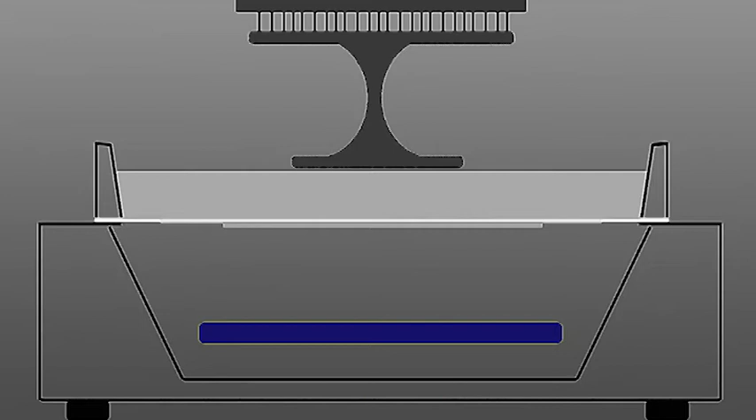What we've got here is the build plate at the top, and we're going to build the table downwards. So we've got the first raft being developed. As we come down, here are the supports, and then after the supports, we start to produce the tabletop. But imagine now that that's coming down into the vat, through the resin, onto the FEP. It's then exposed, and as you pull it off, that very thin surface at the end of those supports is going to be distorted. And so we're going to get some bending on that.

So what we have to do then is not build it level to the build plate. What we should do is build it at an angle. So just taking some of these things off, let's remove all that support. We've now got our table hovering above the build plate. I've turned it over because it makes more sense to do it this way.

And what I'm going to do first of all is go into the controls, and over here I've got some adjustment controls that'll move it horizontally and vertically. This one allows us to spin it. This control here allows you to alter the scale, and this one produces a mirror image.

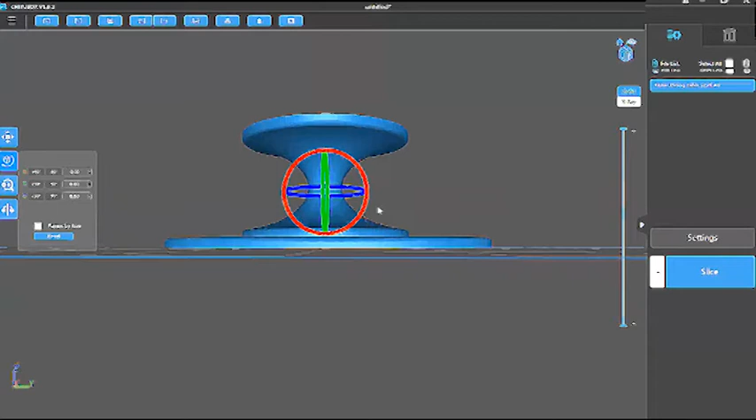So the one we're after is this, and as you can see, as soon as we come up with that screw, we can now tilt this by getting hold of the red circle there. I can tilt that at about 30 degrees. I'll also tilt it forward to back by another 30 degrees or so.

Now, if you look at the actual area we've got, just pull down here through the slicing thing, you can see that the only part of it that's being exposed is a very small area. And compared with the build plate, the raft that we've produced already, then that's quite small. That isn't going to get distorted. And you can build up all the way through. And again, at each stage, each layer is going to be very thin and a very small area compared with the raft. Okay then, so that's how we're going to go with that.

Let's now start putting supports on. Reduce it in size a bit, see what we're doing. Now there's several ways of doing this. First of all, the Z height. This is the height that the item is actually above the build plate. So we could bring it right down or take it right up just by clicking on the arrows. It needs about 5 millimeters to get sufficient distance between the raft and the item that you're printing. Otherwise you get all sorts of distortions creeping in.

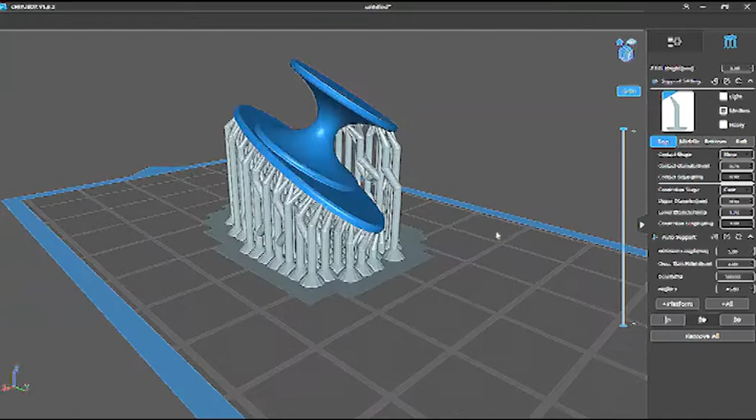We've got it set to medium supports, and on this, it's Chitubox software, I tend to use it. Medium seems to be a pretty good standard for what I'm doing. And just by going down here onto platform, click on there, and you'll get an awful lot of supports generated. Probably more than you need, to be honest. But that's one way of doing it. You could simply slice it, export it, and print it off, and it would look all right. You've just got an awful lot of supports, some unnecessary ones.

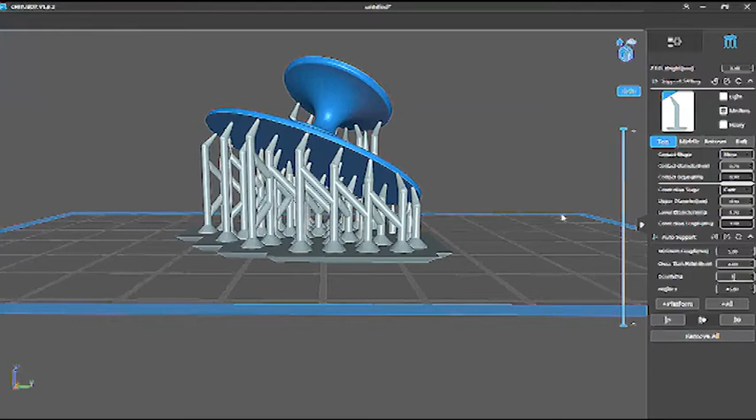We can look more scientifically at that by removing all of them and going down here to the auto support facility. Minimum support length 5 millimeters. It's fair enough because we've got the height at 5.5. The next significant figure is the density. If I reduce that from 100% to 1% and then produce a platform, you'll see we still get quite a few supports in there, but nothing like as many. If we don't do any of that at all, so we remove all those, you can actually put your own in. So these here allow you to add a support, remove a support, or edit a support.

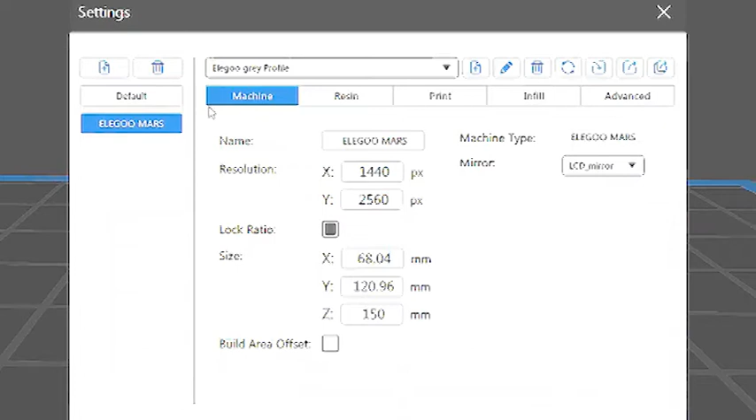Before we slice it, consider the settings for the print. Now my printer is an Elegoo Mars. That's the machine specification. No need to change any of that. The resin spec is normal resin type, resin grey. It's about £35 a litre. The reason you need that is it'll work out how much the print's costing you.

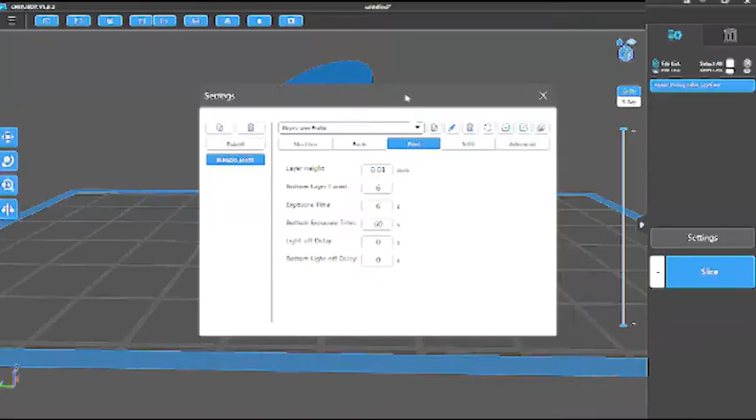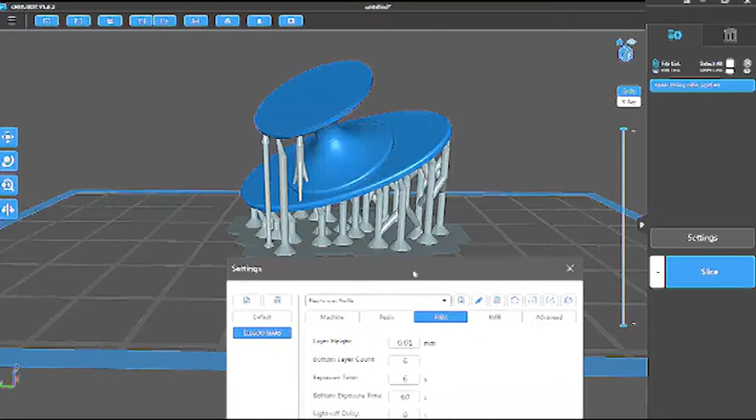And then the print, I'm going to print this at 0.01 of a millimetre. That's 10 microns thick. Bottom layer count, 6 layers. That bottom layer really needs to be well etched into the plate. You don't want that shifting. So you have a number of layers there, probably 6, and the exposure time is quite long. I usually use about a minute, 60 seconds. Again, it depends on how much weight that has to bear. But that's about right, I think. And the normal exposure time for all the other layers, instead of the base, is 6 seconds. It doesn't need to be that long because we're only doing 10 microns thickness.

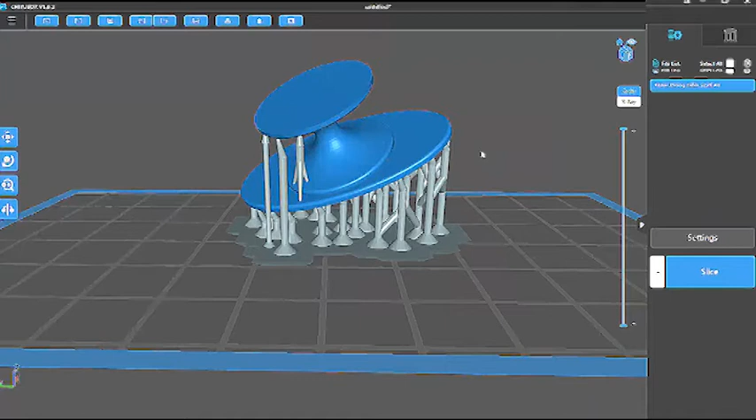If we were doing 100 microns, yes, you'd need to increase the exposure time to make sure that all the resin in that gap is exposed. So having done the settings, and before we slice it, let's just think what we've got here. That section in the center is solid resin at the moment. Now, it's going to cost a bit. You don't want to waste resin by printing on that.

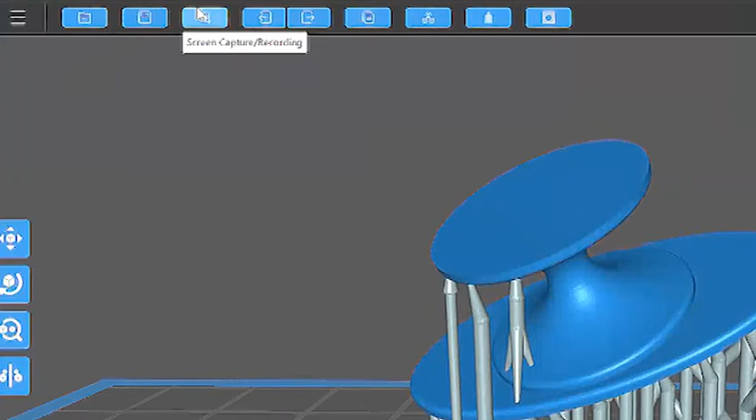So what you could do is hollow it. And up here, we've got open file, save file, screen capture recording, forget that, undo, redo, clone the current model. So if you just did that, you just get another one. Get rid of that. Auto layout, self-explanatory, hollow.

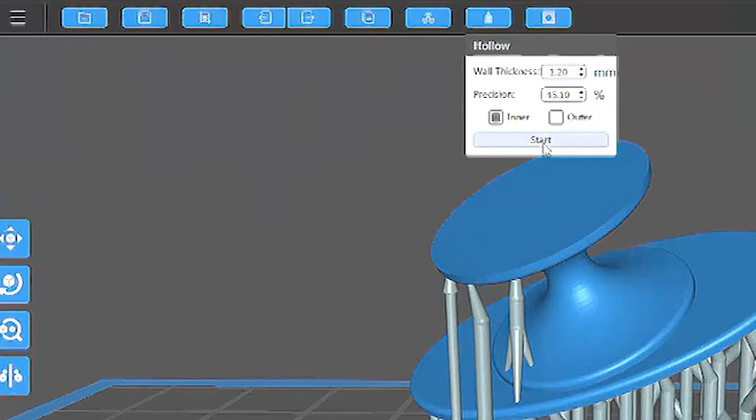Now if you click hollow, you can set the wall thickness to anything you want, but to 1.2 millimeters in here, with a fairly rough precision. I don't really care what the quality of the hollow is because I'm not going to see it. And then click start. What it'll do now is scan through and find areas, you can see here, where it's starting to open up and hollow out the model. A little bit of a hole going straight through there, and now we're into the base. You can see there that's being hollowed out.

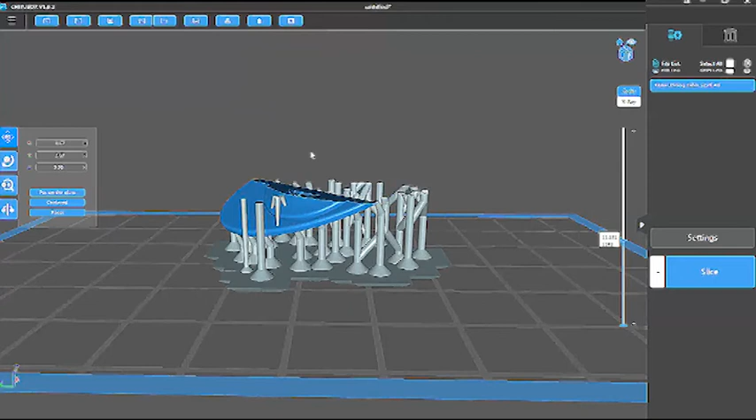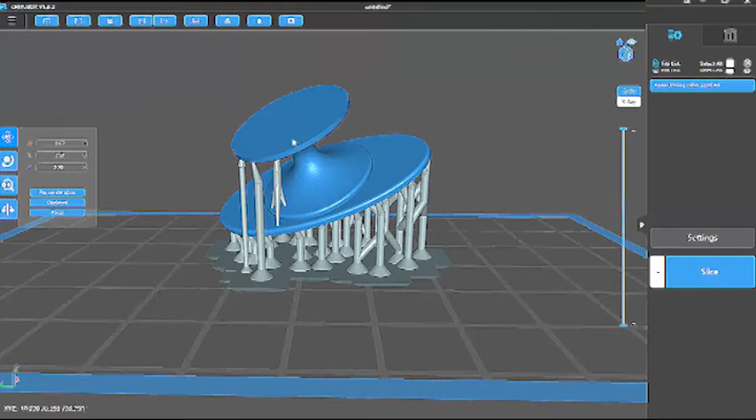So hollowing the model, it won't obviously hollow the supports. Hollowing the model is a useful thing to do if you don't want it to be load bearing in any way, and certainly this table isn't going to carry much load. We've got a hole in here now, but as the table prints, that hole could fill up with resin and then be sealed when we get to the end of the print. So what we'll end up with is some liquid resin in there that hasn't been exposed. Well, you don't want that because that liquid resin in time will expand.

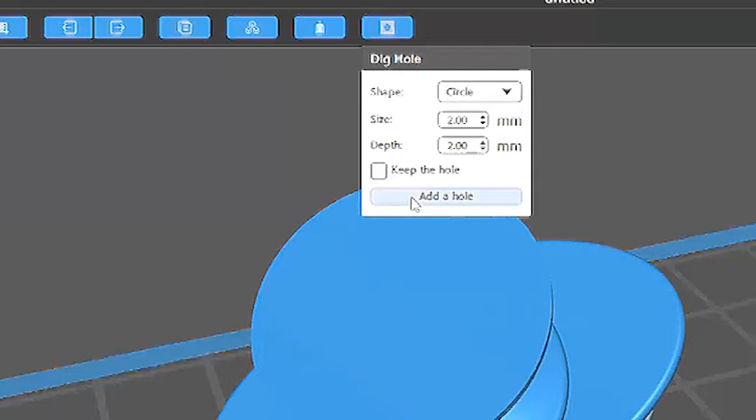So there's another facility on here called dig hole. You can decide the shape of the hole, the size of the hole, and the depth of the hole. You can even keep the hole if you want, so it throws out what it's taken out onto here, so you can use it to put it back in the hole if you need. We'll not bother with that. We don't want the hole. I can just fill it in with filler. So if we're going to add a hole, we'll put one there. I don't know if you can see in there, but you can now see into the table, into the base.

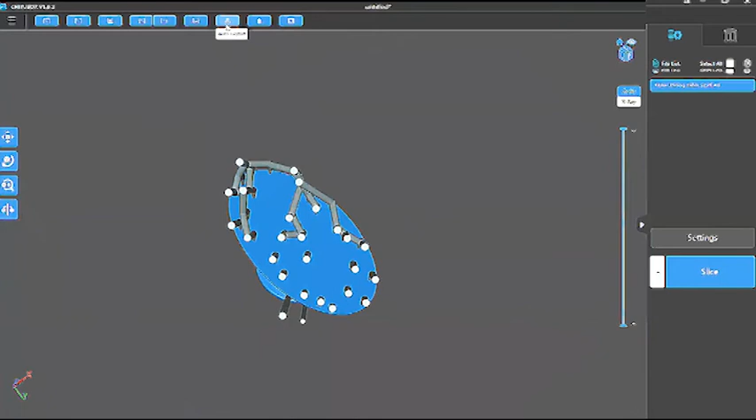And if we go underneath, try and guess the best place for another one, and that's going to be dig a hole, add a hole, about there. That's it. Suppose you can actually just see through there, that's nice. So we've now got a hole all the way through, so we've got drainage of any liquid resin that might get stuck inside the model.

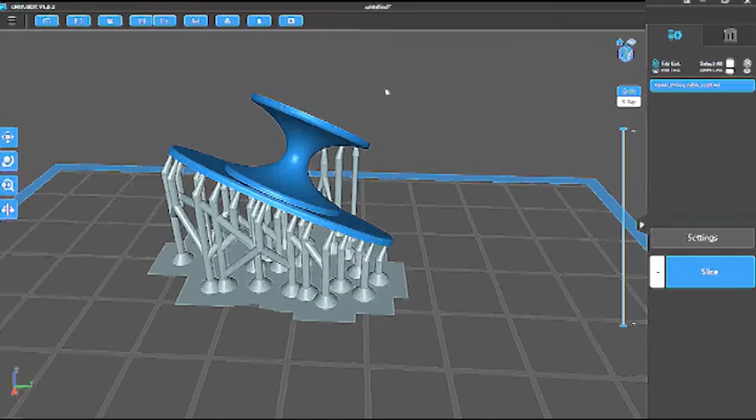Okay, now we've done that, we can now slice the model. It takes quite a while to do the slicing. It's quite a complex procedure. And when it's done the slicing, it will show you what the slicing has done and come up with a very interesting pair of images. If we use this scan bar, take it down to the bottom, makes more sense. So as you're going up here, you can see two things. You can see the image as it will be portrayed on the LCD screen, and you can also see what level you're at on the print itself.

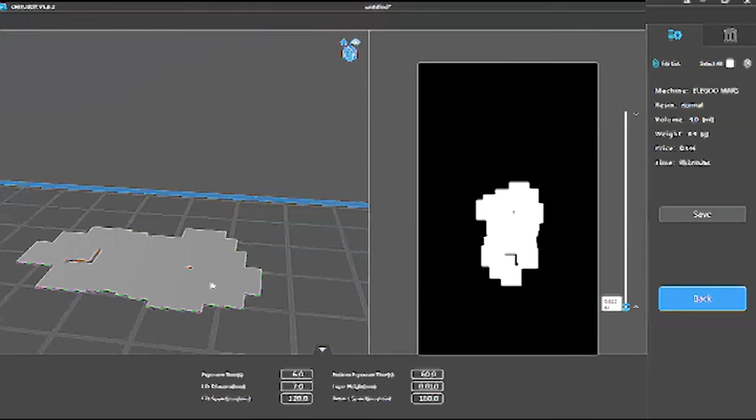So as we come up here, we can see supports and then the table starting to form. The thing to look out for here is just at that moment where the table starts to form, there's got to be something supporting it. If it didn't have anything supporting it, it would print that and then it would just drop off. There's nothing to support that end of the table. So that's why we put the supports at the lowest point. Well, that is the lowest point, supports there, and so we can grow from there. And you can see on the left there how it's growing out and being supported

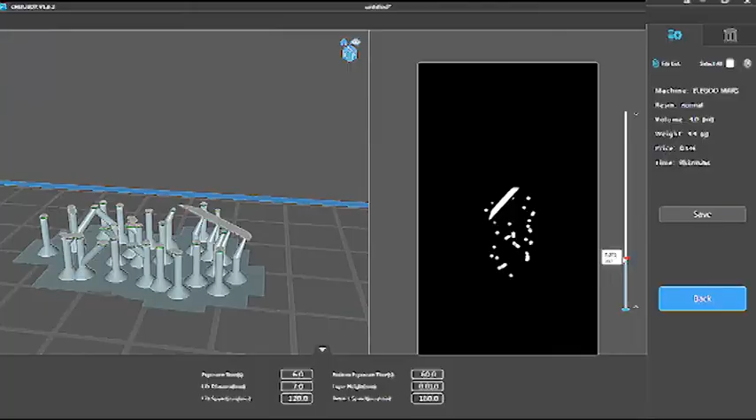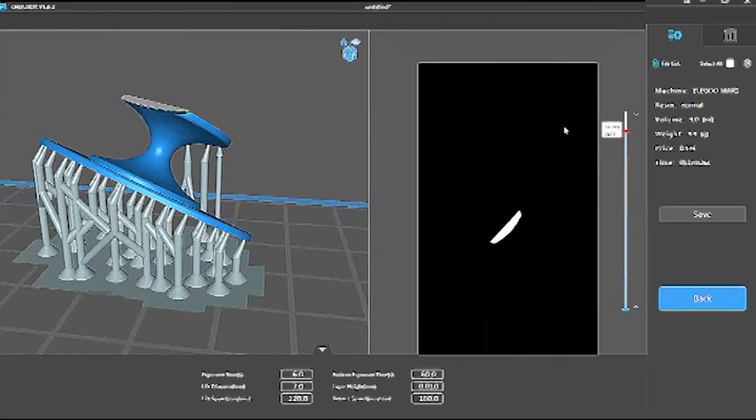as it builds up. Now we're starting to see a little bit of the hollowing, gets narrower for the leg, and then up to the top. So you just see the edge of the hole there, up to the top of the print. So that's ready to go. And so then you can save it.

You'll notice here on the right that it's giving us the resin type, the volume it's printing, its weight, not going to be very heavy at 4.4 grams, the price, so it's used the price of the resin to work out how much resin I'm using and the cost. So this whole table is going to cost a whole 14 pence. But it's going to take 9 hours, 37 minutes, 26 seconds to print. I'm not worried about that. I just set it going overnight.

Then I can save that file, and it will actually save it as a CBDDLP file, which is a Chitubox slicer file. Save it wherever I want, and then copy that onto the memory stick, and then from the memory stick it goes into the printer, and we can just sit back and watch it go.